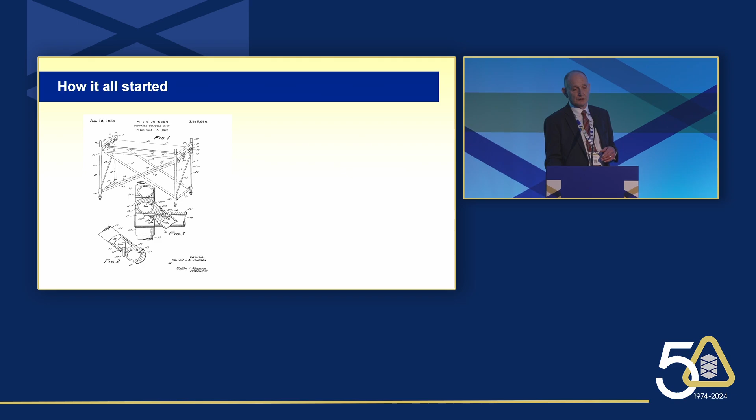So, in the beginning was the word, or in the case of mobile access towers, the patent. This is the Wally Johnson original patent drawing. And there are some interesting things about this to the tower nerds in the room. But for me, the obvious thing is that it looks very little different from towers of today, except in the area of safety, perhaps. Rather obviously, it's rather short on guard railing around a platform. It has a staircase, whereas most towers today have a ladder, and the staircase is a bit bereft of handrails as well. But it looks recognisably similar to a more modern stair tower, like that.

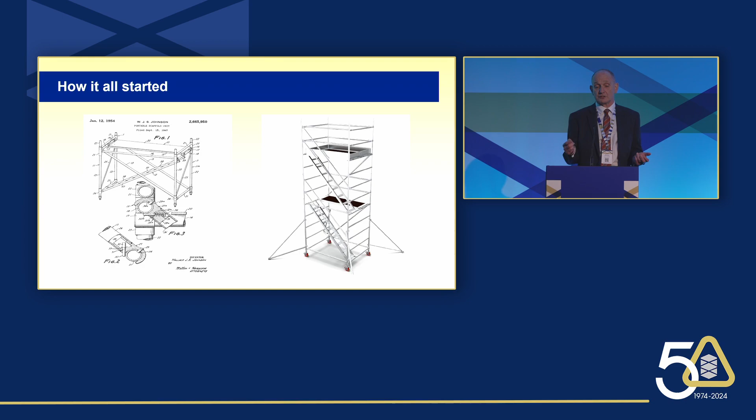Okay, so we're used to towers being mostly on wheels, with horizontal rungs in the end frames instead of diagonals, but still pretty similar. It even has a device in the brace claw to stop the braces sliding sideways, which some manufacturers still use to this day. The trouble is, or rather was, that in those days anyone could decide to make a tower. And so, as the use of towers spread, a whole heap of businesses started making equipment of their own devising, some of it more well thought out than others.

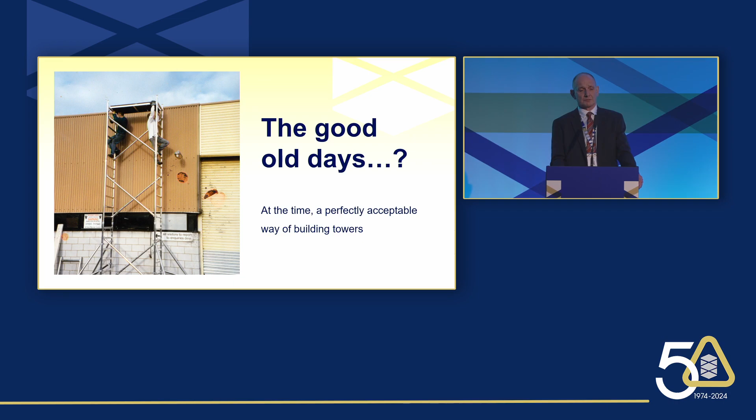We got, in the 1970s, 80s, a whole emerging raft of safety legislation in the UK, and the creation of organisations like PASMA that helped to drive towards a more effective product certification system. The emergence of HD 1004 in 1992 was a start. It brought a rash of hitherto unknown things like metric dimensions and intermediate guardrails of all things.

And although it took some 12 years to transform the Harmonisation Document into a full standard, there is no doubt that this period brought about a sea change in the approach to safety in working at height. And it brought a number of changes, like abandoning old rules of thumb, like if it's less than 2 metres, you don't need to regulate it. And it also brought us things we know today, like the AGR and 3T methodologies.

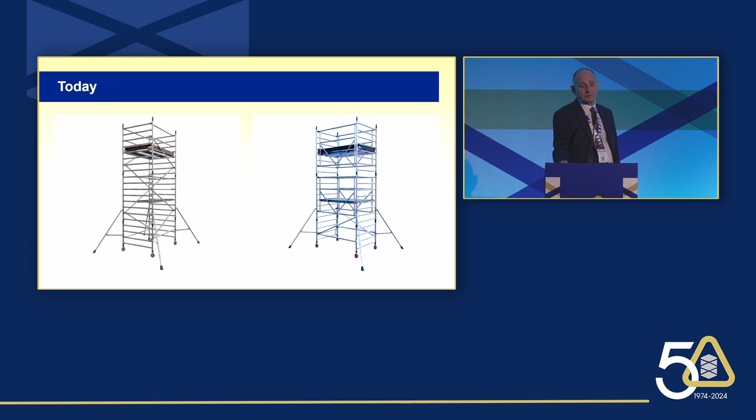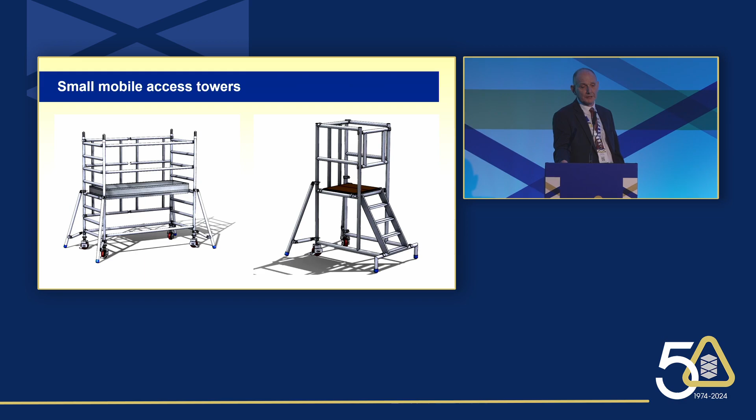And so that gives us, as we come up to the more modern times, towers that look like these. And the process carries on for the development of equipment for below 2.5 metre heights, things like podiums, room scaffolds, delta decks and the like. And even today, the standards committees are still trying, slowly albeit, to introduce improved standards for these small mobile access towers.

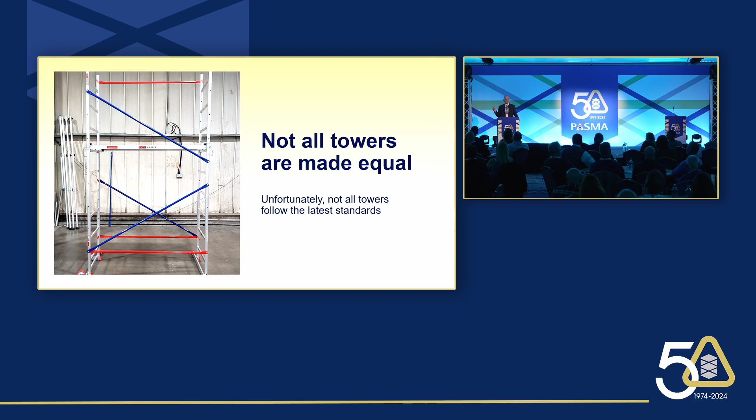However, as we saw in the beginning, and as has been starkly revealed by PASMA's examination of DIY towers, even today, and after all this work, things will not actually get any better without someone to objectively test and certify products against benchmark standards, because the ever-present pressure to make things cheaper will result in dangerous products coming onto the market.

And that seems like a suitable moment to hand over to John Darby to give you an insight into the world of tower testing. John is a veteran of the mobile access tower engineering world, having worked for many years in the engineering and design team of a tower manufacturer, and then for PASMA before helping to set up the Test and Research Centre. John.

Christ, there's a lot of people out there. Jesus. Thank you, Charlie, for that lovely introduction.

As Charlie said, I'm John Darby, the General Manager at the Test and Research Centre, and in the next 5 minutes or so, I'm going to look back at how testing has been done with mobile towers through the ages. So since the earliest days of mobile towers, testing has played a vital role. As Charlie showed on a slide earlier, during the early years and the decades that followed, a large number of companies sprang up, all with their own ideas of how to design and make mobile towers.

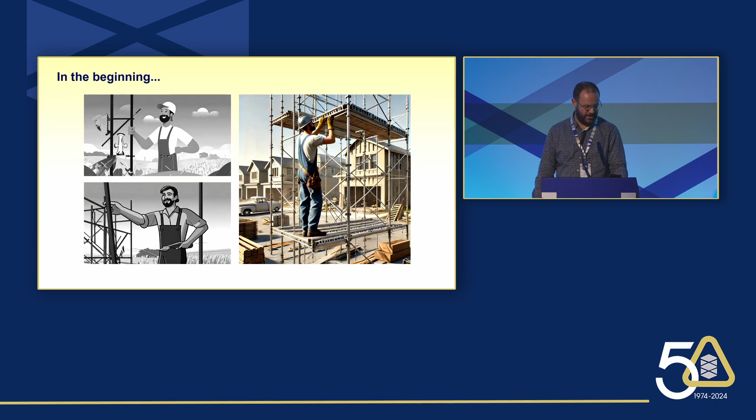Now, in these pioneering black and white days, there wasn't much in the way of published design standards or product specifications. It would have been up to each company to create and validate their own design in their own way. And so product testing was the only way to validate a design's capacity and safety. Engineers needed to create its components and practically put them all through their paces. This was needed to understand areas like failure modes and the importance and differences in bracing patterns.

Thanks to submissions from some of the manufacturing members and a bit of a dig through the PASMA archive, we have an interesting little insight into how this was achieved. And don't worry, for anyone out there, names have been omitted to protect the innocent. So one of the earliest submissions we have here is in drawing form from 1971.

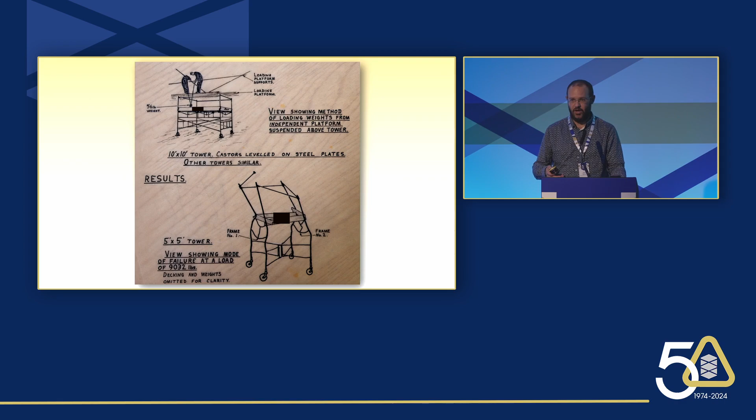Now, the 70s were a little before my time, despite this haggard appearance, but the use of cameras to record evidence of testing doesn't seem that common. So these ingenious engineers used their pencil and ink skills to draw the test, and then what occurred, together with a written detailed description. And this example shows what over 4 tons can do to a little 5-foot square tower.

From what's been shared in the PASMA archive during this period, testing seems to be mainly destructive, taking the tower or a component to failure and then using a factor of safety to work back to a safe working load. Now, presumably, each manufacturer's chosen safety factors may differ because there weren't any published standards or specifications of how to do it.

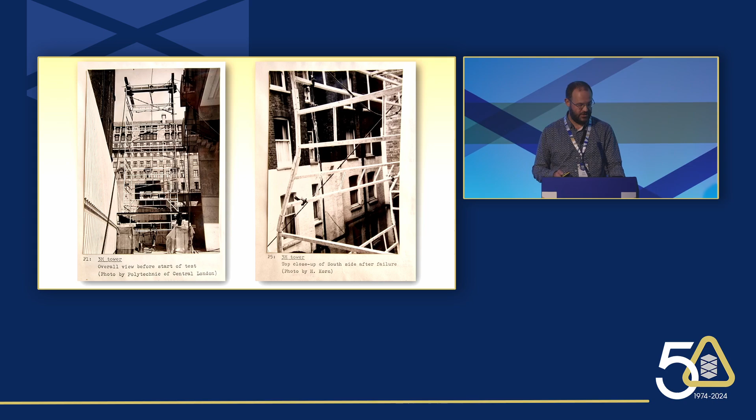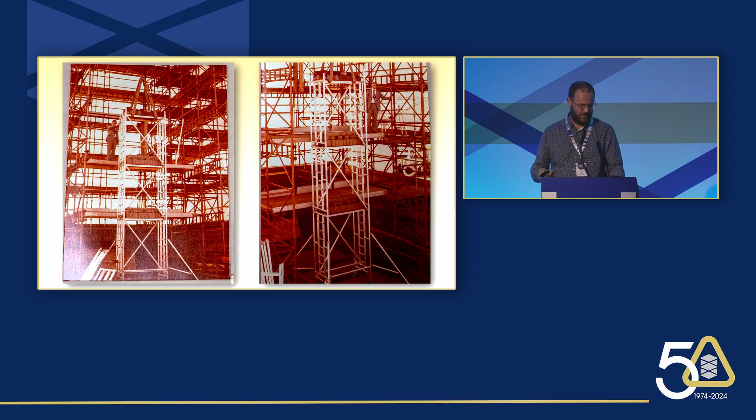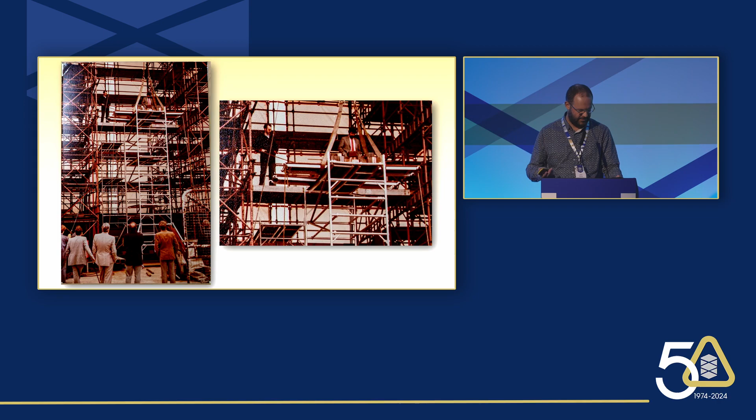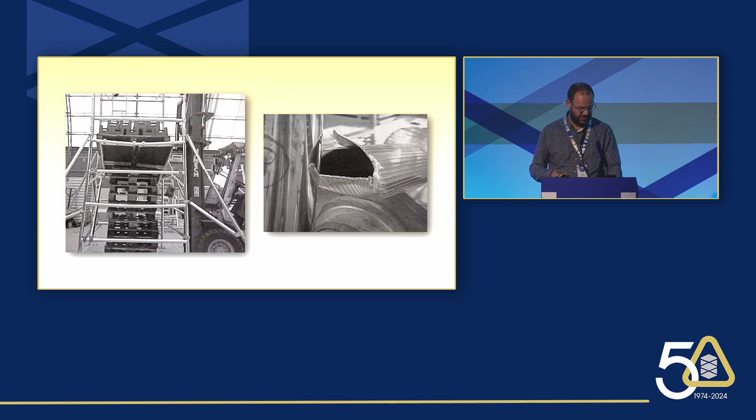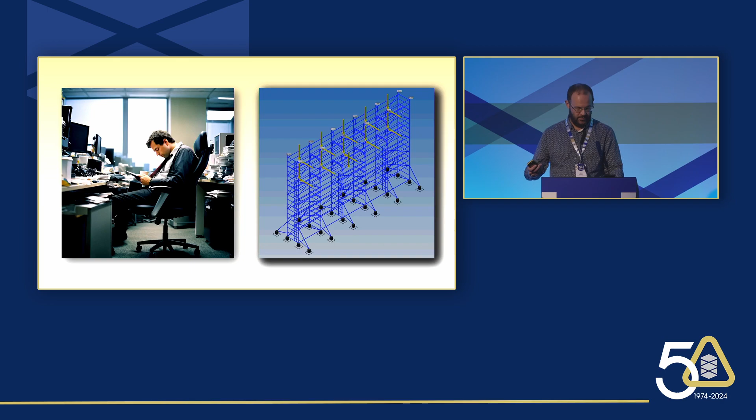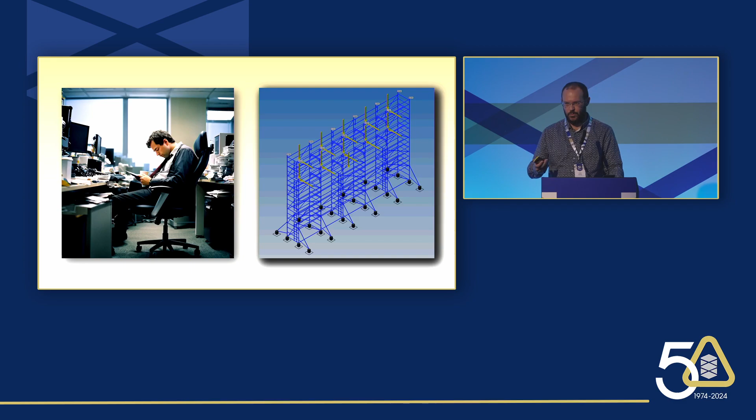As we move towards the modern era with the advancements in standards for both towers and calculations across Europe, tower verification is largely undertaken now in the virtual world, built on many decades of prior work. Today's engineers are not outside braving the elements, sporting the latest in safety fashion, nor are they placing heavy weights atop towers. They're usually sat in the office, or even at home these days, in front of a computer whilst it does the complicated analysis, and they're chugging back another coffee.

I'll deal with the engineers later.

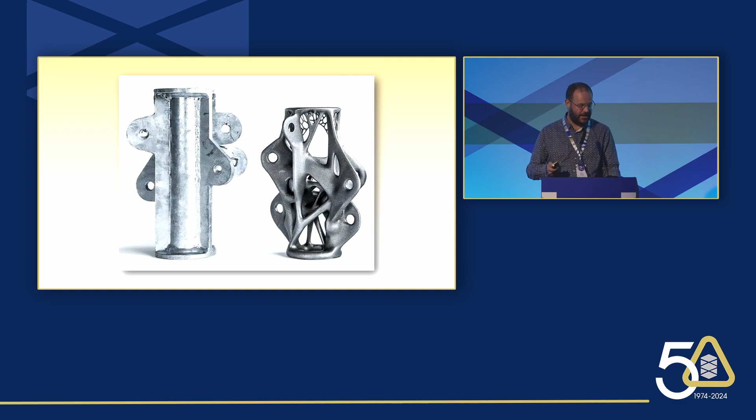Finally, looking to the future, who knows? Maybe with design and calculation software integrated with a little AI magic, these software tools might even design and test the products for you. Thank you very much.

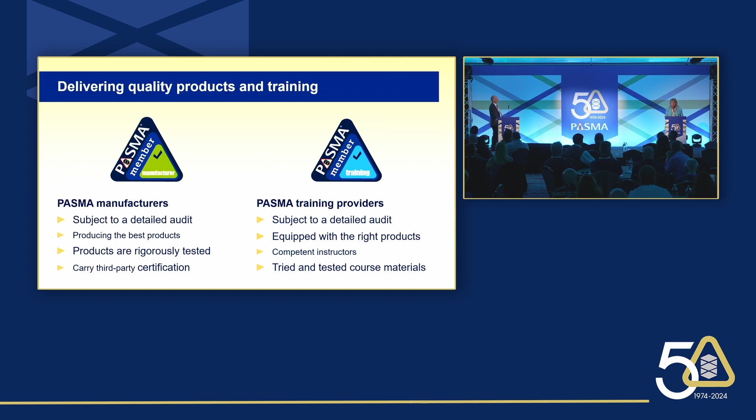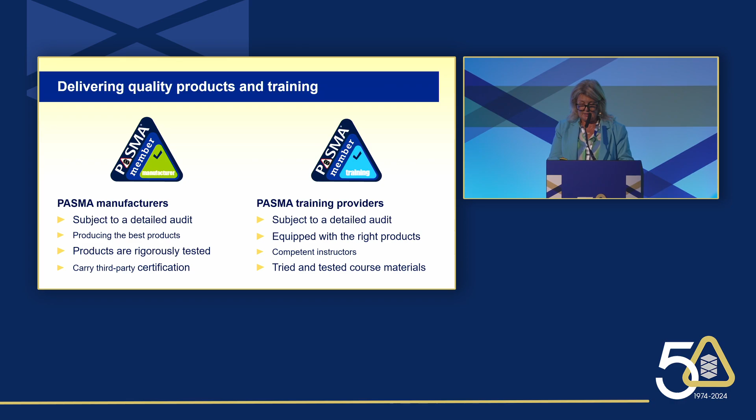Thank you for that, Charlie. Right, as we've already heard, PASMA manufacturers are subject to a detailed audit by PASMA. The manufacturers have produced the best products which are rigorously tested and carry third-party certification. In the next session, you'll hear more about PASMA's comprehensive network of training providers and how they're equipped with products, information and tried and tested methods of delivering training to candidates with various skills, knowledge and experience. Every candidate must understand tower safety and prove that they understand it.

Here's the reality. Currently, mobile towers are used in many different ways, from construction to facilities management, painting, electrical and mechanical, and fitting solar panels. Towers of all types, heights, widths, sizes and configurations are in demand to enable people to work safely at height. And yet, most tower users don't know who manufactured their tower, even though it's on the instruction manual and marked on components. There's not many more ways you can give them that information.

Because a PASMA card is valid for up to 60 months, 5 years, they will probably see their training provider only once every 5 years. The link here is the Hirer/Dealer. PASMA Hirer/Dealers are the regular point of contact with the ultimate user, our customer. Wouldn't it be great if the customer was always confident that the right products, training and advice were consistently available at the point of need, regardless of which location, supplier or member?

Wouldn't it be great if PASMA Hirer/Dealer members were held to the same demanding quality levels as manufacturers and training providers? PASMA started, as Charlie said, as a manufacturers association. The association's growth was propelled by introducing standards and audits for training. Hirer/Dealers are the natural next step. In 2022, PASMA saw this link just after COVID and set up a Hirer/Dealer committee. The PASMA Hirer/Dealer is the first point of call for most tower users. We're the connection with the end user, the ultimate customer.

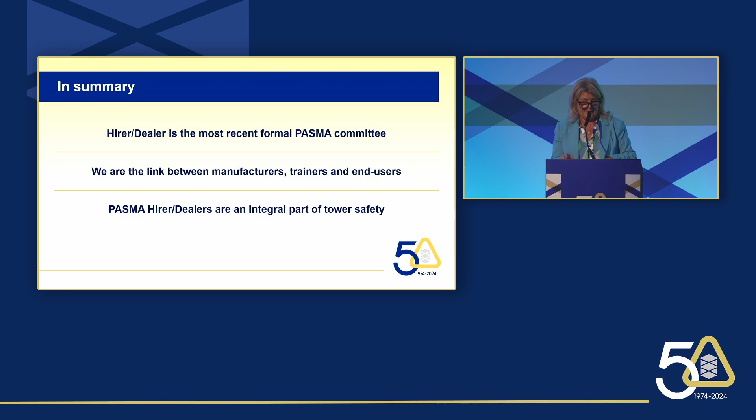And now Ross Dryden is going to give us a taste of the future direction and the impact that digital technologies can have on improving the safe use of towers in the real world. Ross is PASMA's head of digitalisation and has led the advancement of TowerSure, the implementation of the virtual PASMA card, and the development of My Access Industry, a single sign-on service to simplify our members' access to digital services. With a background in product management and in a range of engineering companies, Ross ensures that PASMA's digital transformation is at the forefront of innovation. Please welcome Ross Dryden.

Thanks, Charlie. Right, so we've covered some aspects of product safety, but products are used by people, and people can be a little bit more complicated. So we're moving to a more data-driven way to understand what those people actually do. Historically, we only really knew who the learners were and some key facts about them, and that's really all we needed. But that causes a bit of a problem because it doesn't really give us any knowledge of what they do in the real world. And this has implications. It means that we don't follow up with them. It can mean that we don't have a feedback loop, so we're not learning and improving continuously what we're doing.

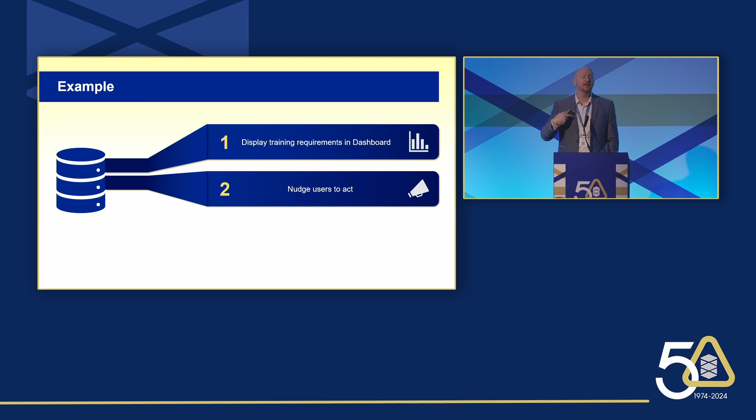So in this particular scenario, you would look at a situation where you can identify what that opportunity is. We now have a method of communicating with those people directly, so we can talk to users through the app, through things like notifications, but we can also talk to their managers and decision makers through things like online dashboards, provide them with recommendations, and use behavioural science to actually encourage them to get more training. And that's the hook that we're looking to implement to improve what we do, grow our business, and improve safety for everybody that uses our products.

And this is just the beginning. It's one aspect of what we're working on, and hopefully it's just the first step of many to come, which are going to transform the way that we interact with our members, the users of our products, and people we train. So I hope that gives you something to think about, and look forward to presenting more to you in the future. Thank you very much.